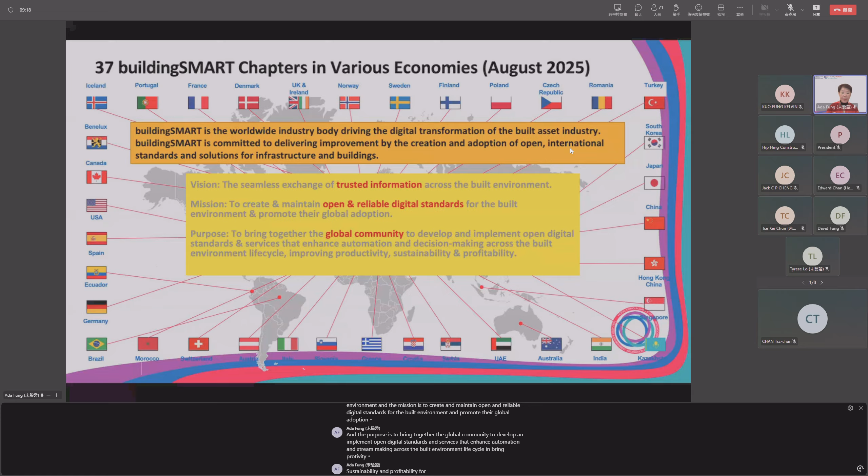So we adopt OpenBIM as we want to be successful in BIM implementation for collaboration with reliable data exchanges, and sustainability is safeguarded by long-term interoperable data standards. At its core, OpenBIM is a collaborative process that is vendor neutral. This is very important, especially when there are so many geopolitical situations that may change.

While BIM is a digital representation of built assets, GIS is a framework for gathering, managing, and analyzing data. So the use of BIM for assets and GIS for spatial data supports applications across virtually all sectors of human activities. This is important for a smart city.

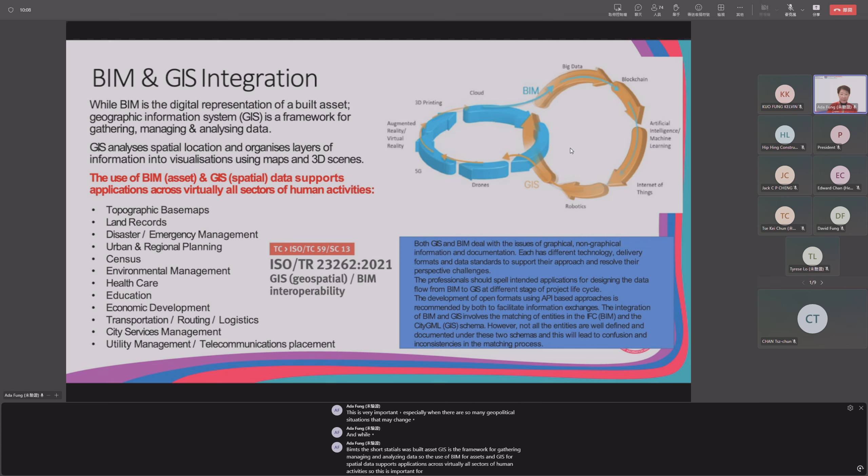First is virtual classroom, like tonight's event. Second is the BSI Professional Certification Foundation Program. Third, BIM and GIS training program. Fourth, special events in hybrid mode. Fifth, the Hong Kong OpenBIM OpenGIS Awards. And the sixth is Building Smart International Summits and Building Smart International Awards.

We grow these day by day and year by year. So we are now in our virtual classroom. Classes have been held since April 2020, and we're now in season 11, not 10. It's OpenBIM from learning to practice. Season 10 was OpenBIM, IFC, and beyond. So now we're focusing more on practice.

So the second type of training is professional certification, where Building Smart International certification is the global standard for OpenBIM training. That's why we adopted it. And we now have 2 certified training providers in Hong Kong, namely SBI and also BLE Shenzhen.

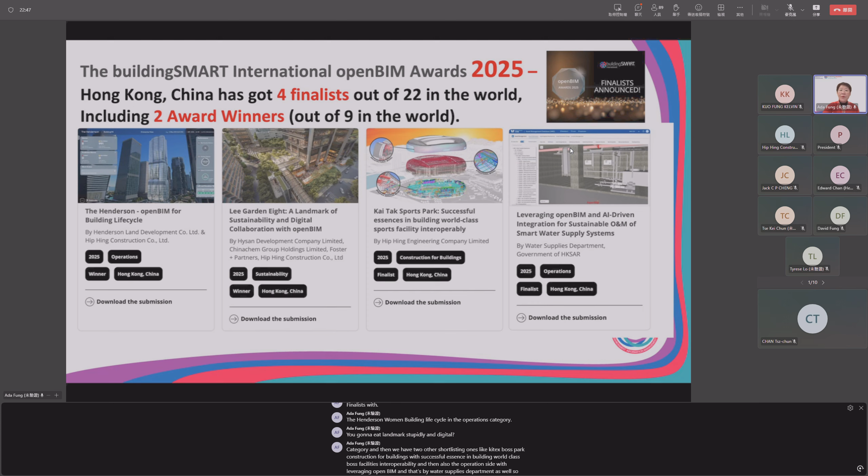Next, I would like to invite you to join us to go to buildingSMART International Summits program. Enjoy special discount for Hong Kong if you get 10 or more delegates. The next one will be held March 24 to March 26 in Porto, Portugal.

And there are 10 sector-facing domains comprising airports, building, construction, infrastructure, electrical, product, railway, regulatory, technical, and maritime, followed by a few more to come, which is healthcare, water management, energy, and power.

So here, with the core OpenBIM workflow from the use case management to define your business needs, and then define project information requirements with BSDD and also IDS, and then create a data set by using IFC, and then validate, and then review, communicate, and collaborate with BCF, and then that is to share using OpenCDE.

And for certification for the training part, we have the foundation program already in practice, and next we're going to launch the practitioner level. So stay tuned.

And in a Building Smart context, what do we expect? Now, we aim to achieve more sustainable, less expensive buildings infrastructure through optimized decision-making and automation efficiencies, enabled by data interoperability and accessibility via open digital standards and services.

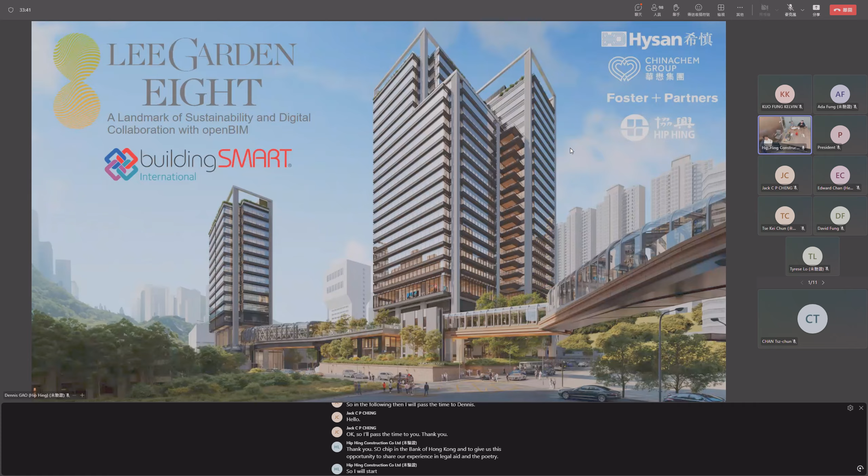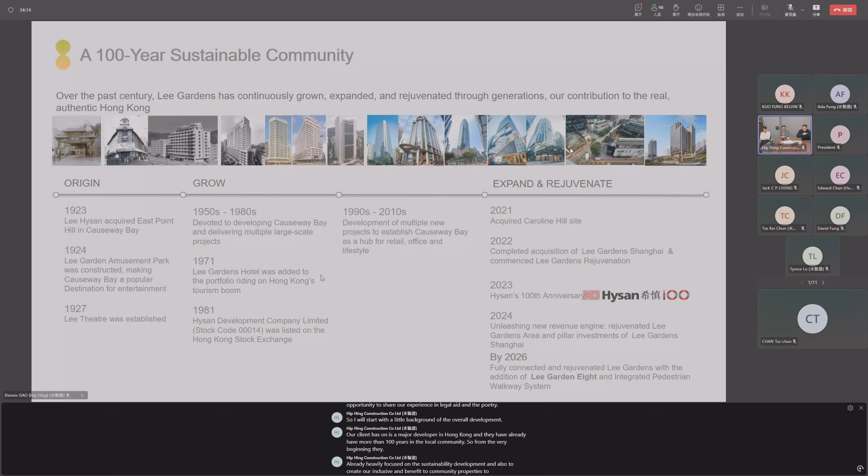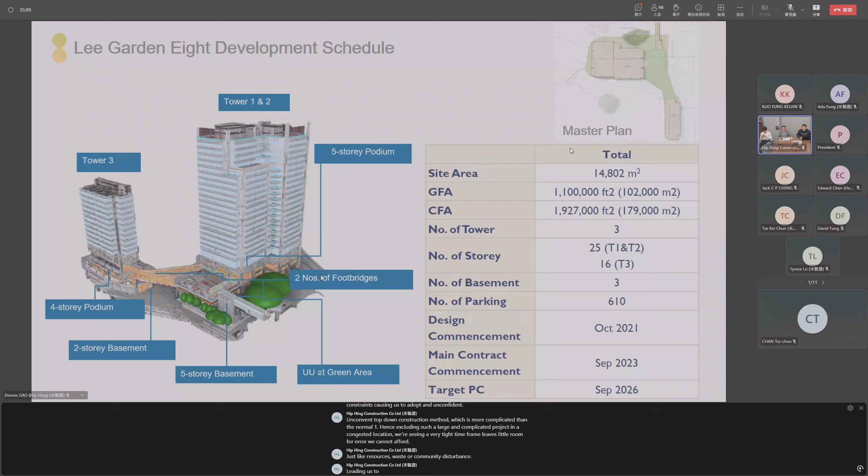To understand the scale of the project, let's look at it. Lee Garden Eight is a massive and complicated project, comprising 3 office towers and 5 basement floors with over 1 million square feet of GFA. It has many site constraints causing us to adopt an unconventional top-down construction method, more complicated than normal. Executing such a large project in a congested location within a tight time frame leaves little room for error. We cannot afford inefficient logistics, resource waste, or community disturbances, which made clear traditional construction methods are inadequate for these challenges.

We assembled a world-class team to realize our vision, including Foster + Partners, Ronald Lu & Partners, Arup, WSP, Arcadis, etc., with Hip Hing as the main contractor and ATAL as the MEP subcontractor. In our industry, consultants and contractors often work with different software and workflows, creating silos where information can be lost or misinterpreted. We dismantled these silos by insisting on open standards, establishing a unified language for seamless collaboration. This ensures transparency and efficiency across all parties and allows us to retain ownership of a comprehensive, well-coordinated BIM model.

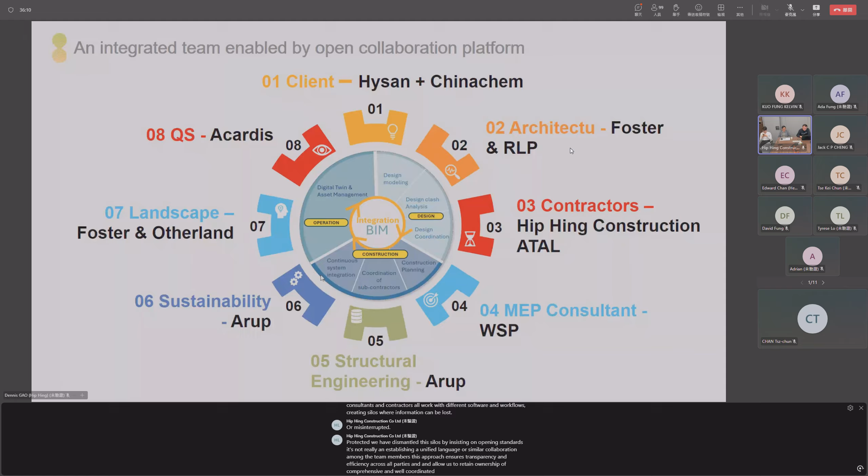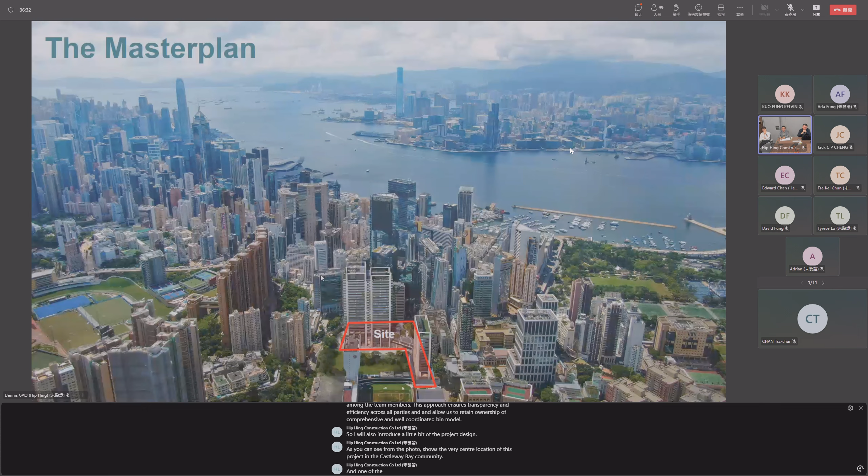I'll also introduce a little about the project design. As you can see from the photo, this shows the very central location of the project in the Causeway Bay community. One major site condition is the banyan tree shown here, which is more than 100 years old - an old and valuable tree. We have an obligation to preserve and protect this tree throughout the entire development process.

From the very beginning, our architect considered this tree in the overall design of the property. The concept is not to create an isolated island of property in the community, but to create an open, inclusive environment to benefit the overall population in this area.

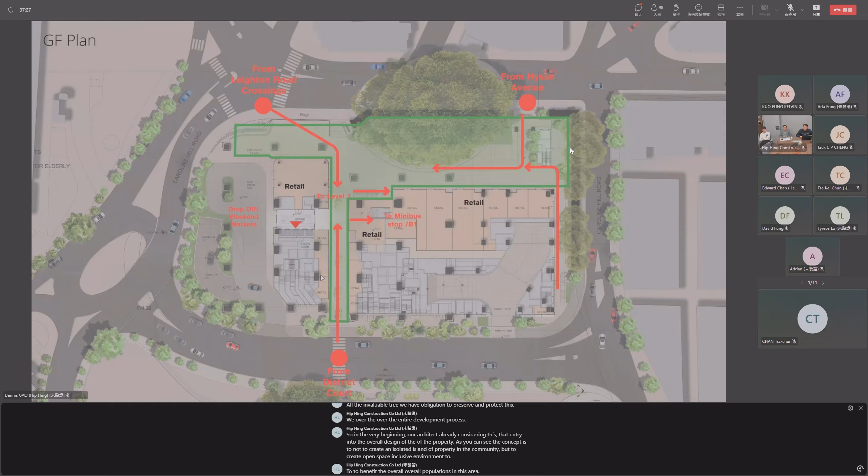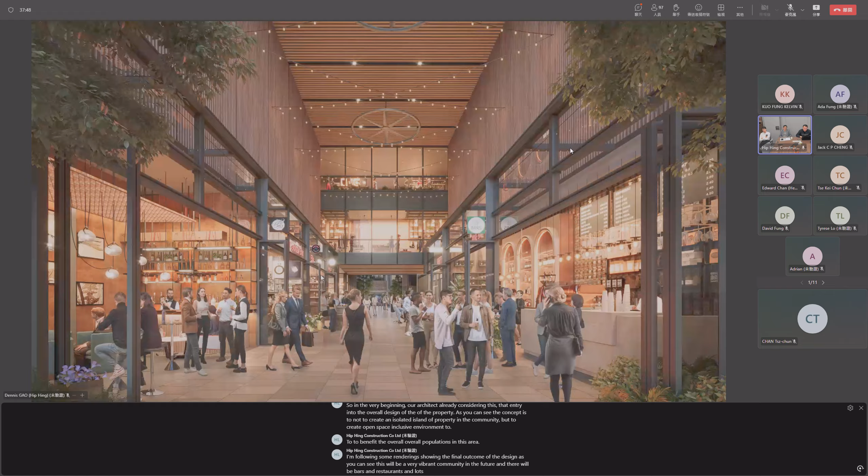Following renderings show the final outcome of the design. This will be a very vibrant community in the future, with bars and restaurants and lots of open space for people to gather and chat. Maybe in the future you and I can spend some time in this project, and we welcome you to visit after completion.

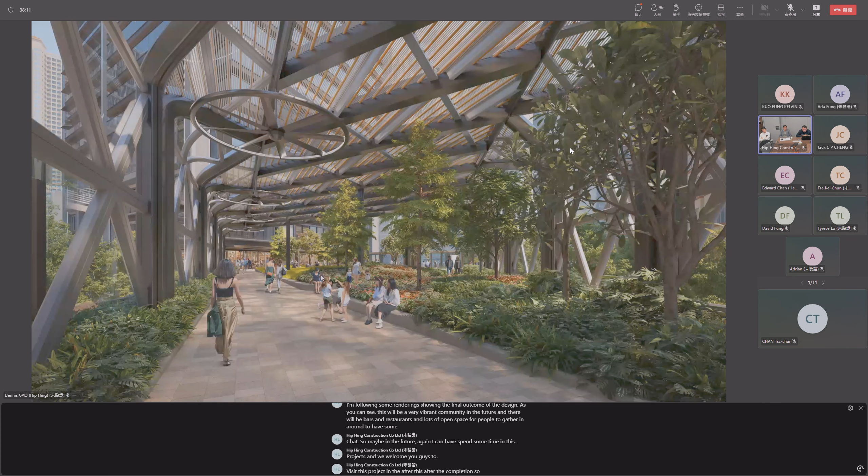Back to the BIM core part, I'll start with our roadmap. Our BIM implementation follows the CIC Hong Kong standards and complies with ISO 19650 governance. We established the open BIM approach as the foundation for information management across the entire project lifecycle. In the following slides I'll walk you through specific use cases demonstrating how we applied open BIM to solve our most critical project challenges.

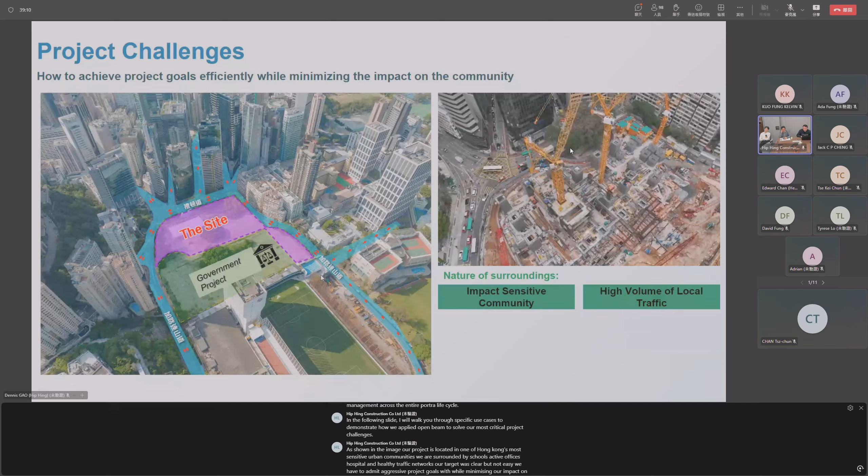As shown in the image, our project is located in one of Hong Kong's most sensitive urban communities, surrounded by schools, active offices, a hospital, and heavy traffic networks. Our target was clear but not easy: we had to meet aggressive project goals while minimizing our impact on this vibrant community. We could not afford to be a bad neighbor.

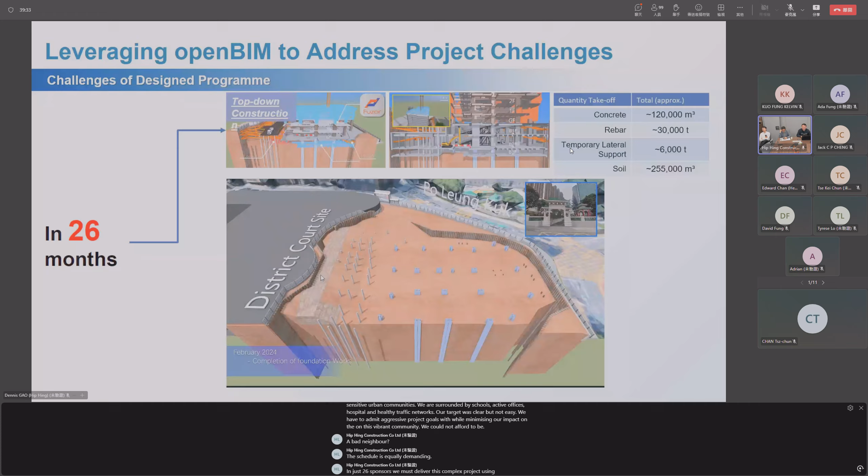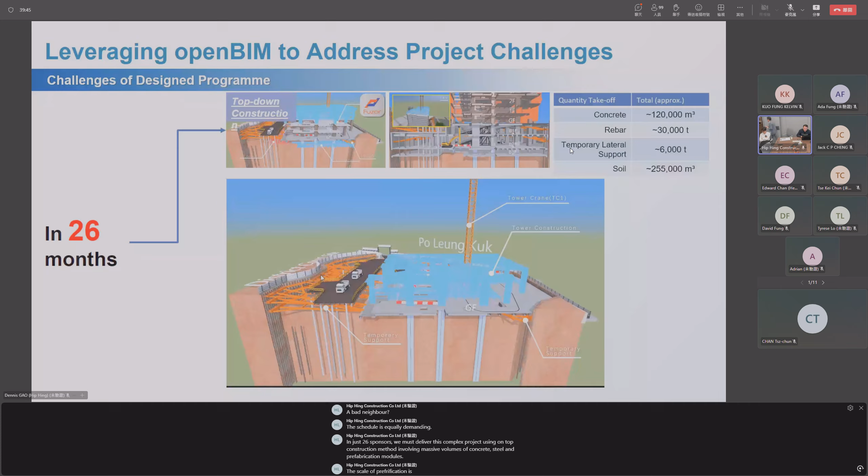The schedule is equally demanding. In just 26 months we must deliver this complex project using a top-down construction method, involving massive volumes of concrete, steel, and prefabrication modules. The scale of prefabrication is very large - over 80% of the building services were designed to use the MiMEP method, resulting in more than 7,400 modules that needed to be manufactured, transported, and installed. To manage this complexity, the open BIM approach was essential to keep the client, designers, and contractors synchronized around a single source of truth. Let me elaborate using our MiMEP journey as a case study.

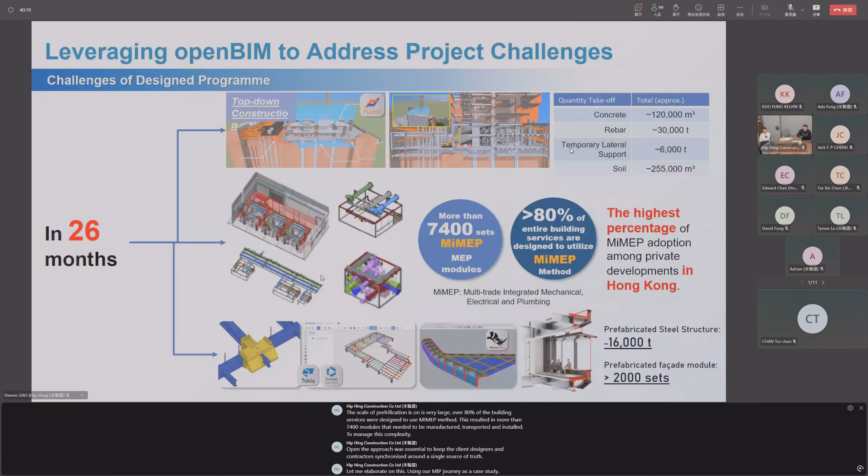As mentioned, more than 80% of the building services are designed using the MiMEP method - the highest percentage of MiMEP application for a private development in Hong Kong. The extent of these modules is comprehensive, distributed across every single level of the building. We categorized them into 6 major types, each including a significant volume of modules. ATAL is the E&M, NSC, and MiMEP specialist contractor for this project. Managing this volume of implementation requires precise collaboration among contractors, designers, and project managers.

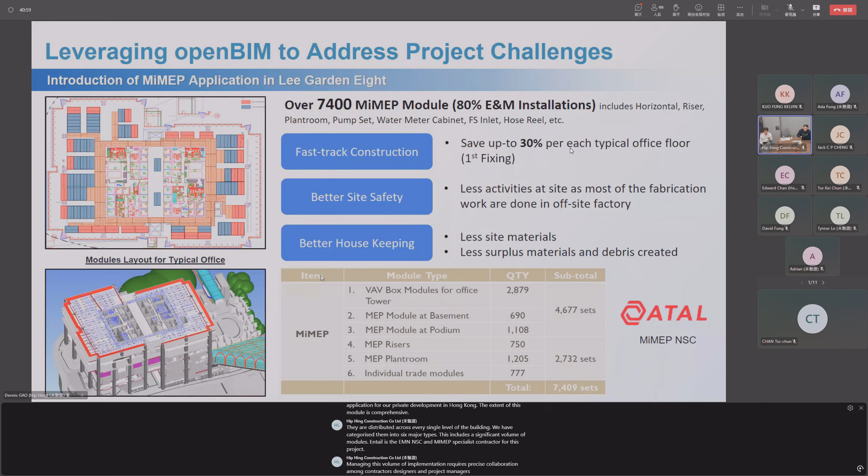Our MIMEP journey began with intensive design coordination. We used the OpenBIM platform to bring the consultants and contractors onto the same page. The key here was standardization.

By defining a library of typical repeatable modules, we made the manufacturing process efficient and the installation sequence flexible. We also ensured the layout was optimized for future maintenance access.

Technically, we utilized clash detection tools and software for rule-based code checking to identify design issues while using BIM Track to manage the resolution process.

As the main contractor, we lead this workflow. We collected individual trade models from the NSCs and combined them with the builder's model for tracking. Together with our engineers, we conducted the initial screening to find the most efficient way to resolve these issues.

On the screen, you can see two comparisons showing the result of this coordination, transforming a complex web of services into a rational, clash-free arrangement.

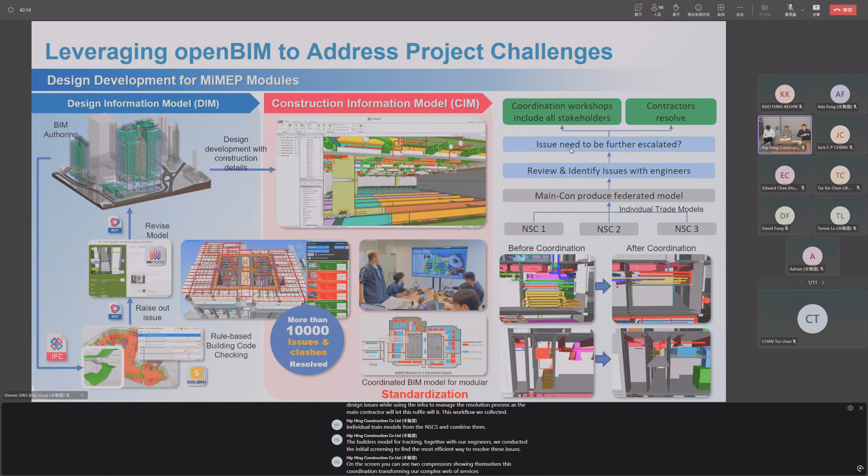The result of this digital collaboration is a seamless transition from the design model to the fabrication model. What you can see here is the direct one-to-one relationship between the BIM model and the physical module being assembled in the factory. This process eliminates ambiguity and ensures precision.

The MIMEP NSC agent also applied an RFID tracking system to help the project team monitor the fabrication, delivery, and installation status. This end-to-end traceability is a powerful example of how BIM, DFMA, and IoT-enabled logistics can work together.

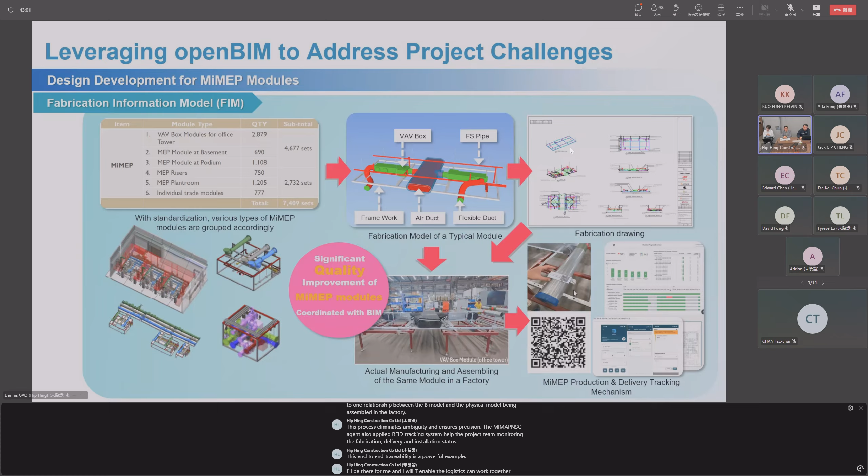With thousands of modules to handle, logistics became one of our biggest challenges. We used ArcGIS data to analyze delivery routes and plan our logistics early on. However, getting the modules to the site was only half of the battle.

Due to the size and weight, vertical delivery required tower cranes, which were already busy with steel erection. To manage this, we conducted detailed lifting simulations and scheduled dedicated crane slots to ensure just-in-time delivery.

Once the modules landed on the designated floor, automation took over. We utilized carrying robots to transport the modules to their installation spots, then used remote-controlled lifting platforms to elevate them to target heights for final installation. This combination of simulation and robotics ensures a smooth, safe, and efficient installation process.

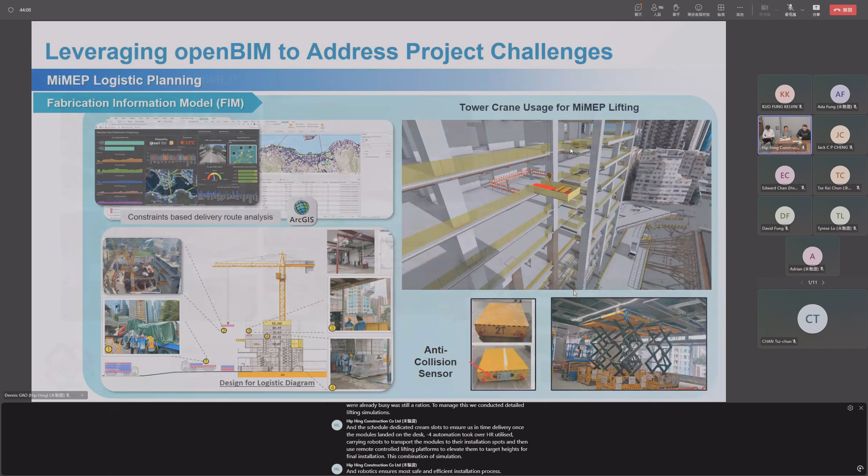Please take a look at these photos. As you can see, the construction site is quite clean and organized. This is the direct result of MIMEP. It not only improved the quality of the MEP installation, but also significantly reduced construction waste by 70% and lowered the installation manpower by 30%.

If you look at the comparison between the as-built laser scan and our coordinated BIM model, you will find the final installation matches exactly what we planned in the early stage.

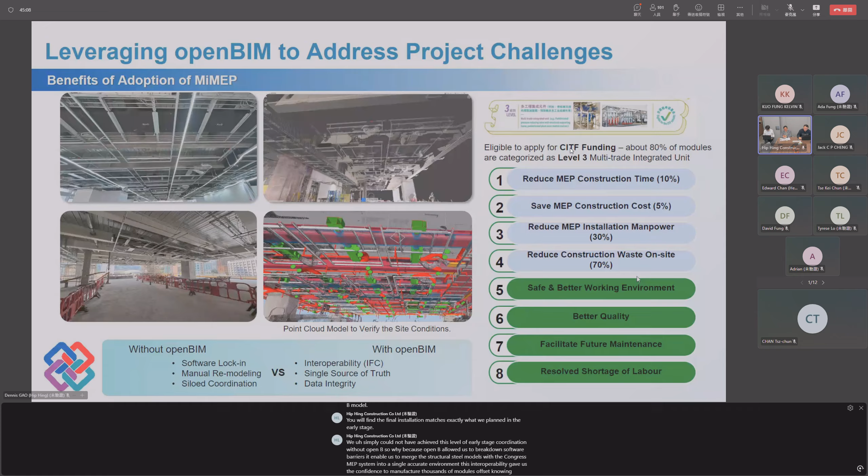We simply could not have achieved this level of early stage coordination without OpenBIM. Why? Because OpenBIM allowed us to break down software barriers. It enabled us to merge the structural steel models with the complex MEP system into a single accurate environment. This interoperability gave us the confidence to manufacture thousands of modules off-site, knowing they will fit on-site conditions when they arrive.

So how can we carry this design and fabrication certainty into operations? To echo Professor Ada's sharing previously, I will use the asset information model workflow as a case to illustrate how OpenBIM workflow can be applied in a project.

We shall start with the client's asset information requirement, especially the need to coordinate with facility managers to define the required parameters in the BIM model. Client-specific bSDD can be created as the dictionary for the parameters, which can be reused across the rest of the portfolio. In parallel, we prepare an IDS file for data compliance checking.

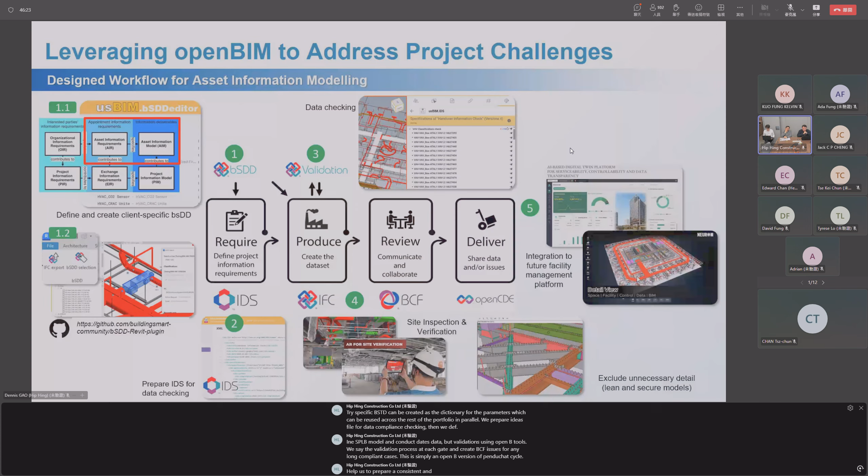Then we develop various verified as-built BIM models and conduct data validations using OpenBIM tools. We set up a validation process at each gate and create BCF issues for any non-compliant cases. This is simply an OpenBIM version of the Plan-Do-Check-Act cycle. It helps us prepare a consistent and vendor-neutral base for digital twin integration.

Our challenge also extends beyond our boundary. We share interfaces and structural dependencies with an adjacent government project. The harmony of the structural design determines community-wide stability. There are critical needs for design coordination of the excavation program, temporary structure, and underground utilities.

Since the nature of the neighboring project is a law enforcement facility which possesses high security concerns regarding internal design information, plus the concern of software versioning issues, we came to an agreement to use an interfaces-only approach that exchanges IFC4 reference view models for coordination and analysis.

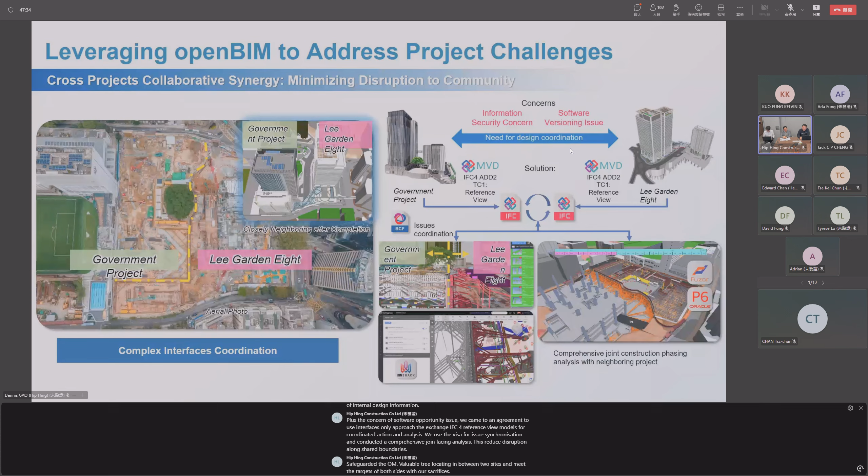We used BCF for issue synchronization and conducted a comprehensive joint phasing analysis. This reduced disruption along shared boundaries, safeguarded the old and valuable tree located between the two sites, and met the targets of both sides without sacrifices, which is an uncommon cross-project use of OpenBIM in a building project.

We also utilized ArcGIS data to make data-driven decisions about logistic optimization. This resulted in creating traffic diversions within our project to ease the burden on the community and avoid conflicts with the neighboring project. Furthermore, we had to manage the interface with existing buildings, including a new footbridge connection.

We combined existing condition models with our design models to conduct early sequence planning. This allowed us to optimize the sequence for overnight lifting installation, minimizing the impact on local traffic.

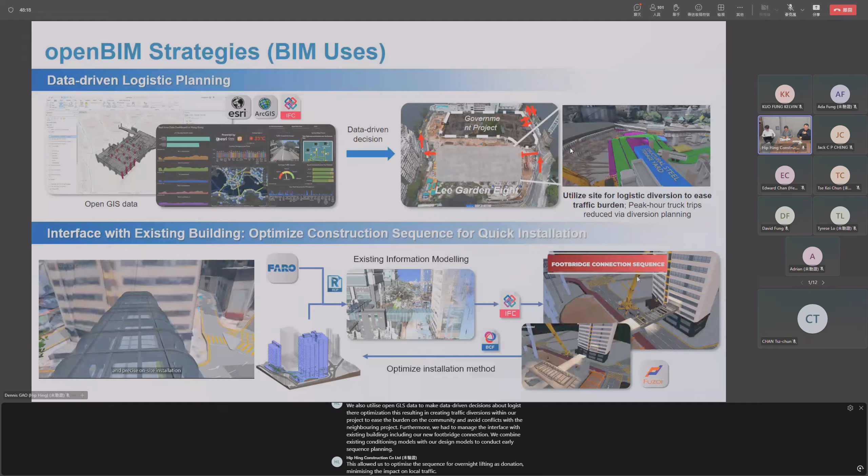Of course, safety is our highest priority. To ensure it, we use 4D simulation to virtually rehearse complex construction activities before actual implementation. This allowed us to visualize the exact sequence, map out access routes, and pinpoint potential safety risks. By doing this, we could improve our method statements, spot clashes with temporary works, and most importantly, communicate clear visual safety measures to our frontline workers.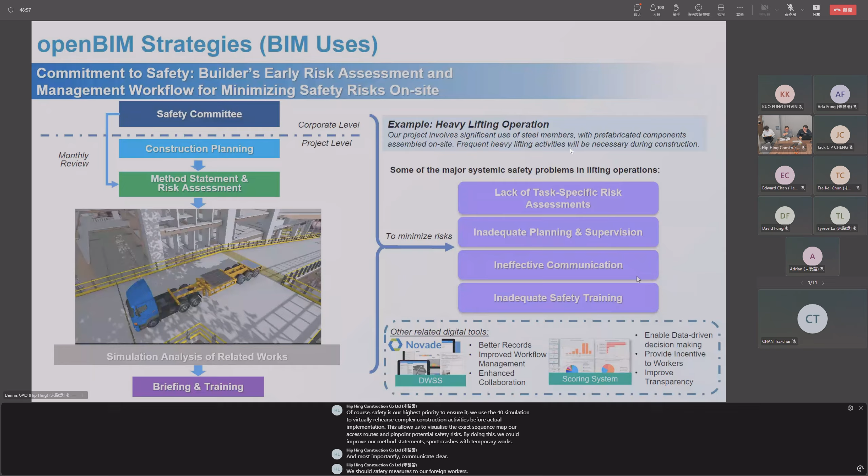To increase coordination efficiency for site construction, we went beyond rule-based checking and utilized visual programming to automate repetitive tasks. For example, we automated labor-intensive processes in drawing production, such as view generation and tagging. This accelerated our mass drawing production by 300%.

We also adopted the BIM cave for this project. By integrating actual site conditions with our design model, we created a virtual mock-up. This immersive experience made design reviews much more intuitive, driving faster and more confident decision-making.

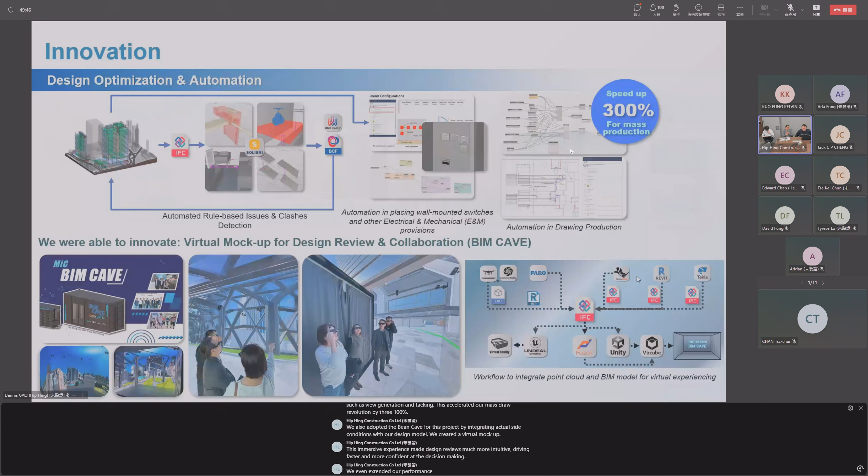We even extended open formats into innovative product design and development. For example, we deployed a remote control tower crane system, the first of its kind to practically operate on a construction site in Hong Kong. In fact, it has been continuously working on site for more than a year now.

We not only used open formats in the product design itself, but we also used the BIM model to create a training simulation program. Currently, we are also exploring model-based tower cranes and autopilots.

Furthermore, open BIM formats allowed us to integrate the project model into our proprietary product, the centralized management platform, by combining the model with data from IoT sensors, smart safety equipment, and our digital works supervision system, to enable transparent real-time project management.

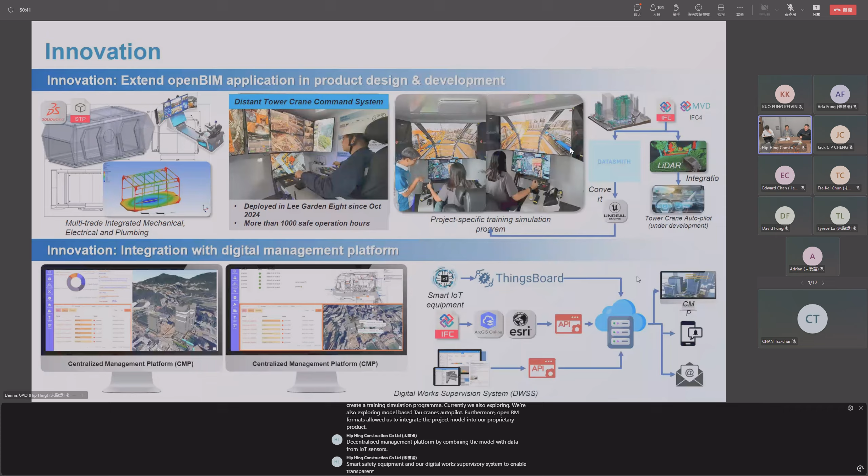Beyond the digital model, our commitment to innovation extends to our frontline management. We implemented Hip-Hing Connect, our proprietary mobile app system. It acts as a safety performance management tool, where worker behavior is recorded. We use this to drive a positive safety culture. Good behavior is rewarded, while unsafe behavior is penalized accordingly.

Finally, we are actively adopting construction robotics on site, as shown in the photos and videos. These robots are actually deployed in our project. We believe these robotic technologies can help us increase productivity and, most importantly, keep our people safe.

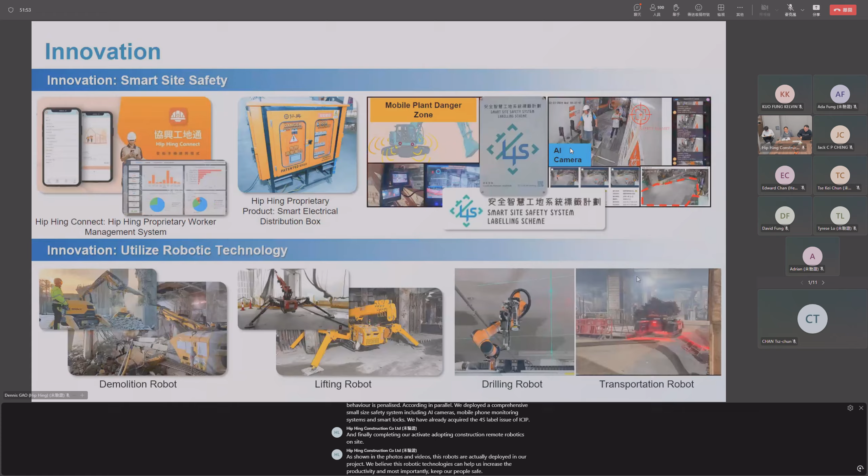To quickly wrap up the technical execution, with the help of Unity tools, we were able to resolve thousands of clashes rapidly, keeping the project on track and reducing abortive works.

Without the OpenBIM approach, we simply could not have secured this ambitious program or ensured the precise manufacturing of such a massive volume of combination elements, especially in MiC (Modular integrated Construction).

Furthermore, OpenBIM formats helped us secure data integrity across thousands of file exchanges, ensuring data longevity for the future operation stage of the project. So that's all of my sharing.

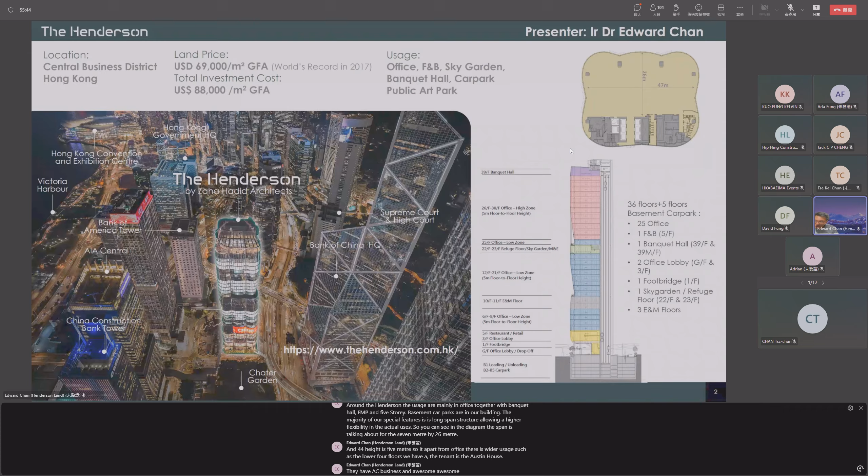We have a tenant that is an auction house. They have exhibitions and auction activities in the same floor space.

The Henderson was completed in the first quarter of last year. Tenants have already moved in, and the Henderson is now the new icon of Hong Kong. You can see some of those videos, such as our partnership with the World Green Building Council, and also features with BBC StoryWorks and National Geographic on specific topics.

Our anchor tenant, Christie's, also speaks to how our ESG partnership program aligns with their long-term operations. The Henderson has already been accredited by 10 different accreditations covering green building, health and well-being, smart building, and sustainable transport and lifestyle aspects. The purpose is to set out a future-proof framework to facilitate long-term sustainable operations.

Another important milestone for the Henderson, as just mentioned by Ada: we achieved the winner award in 2022 for the Building Smart International Award in the construction category, and last year we also received the winner award in the operation category. These achievements set out the foundations for Open BIM applications throughout the project, from the design stage to the operation stage.

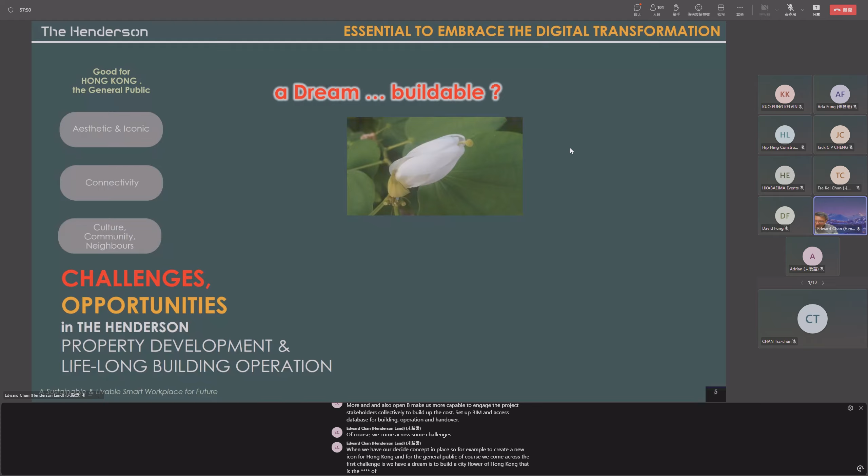Of course, we came across challenges when putting our design concept in place. For example, to create a new icon for Hong Kong, our first challenge was our dream to build the city flower of Hong Kong - the bud of a Bauhinia. The problem was that it was not buildable given the technology available at that moment.

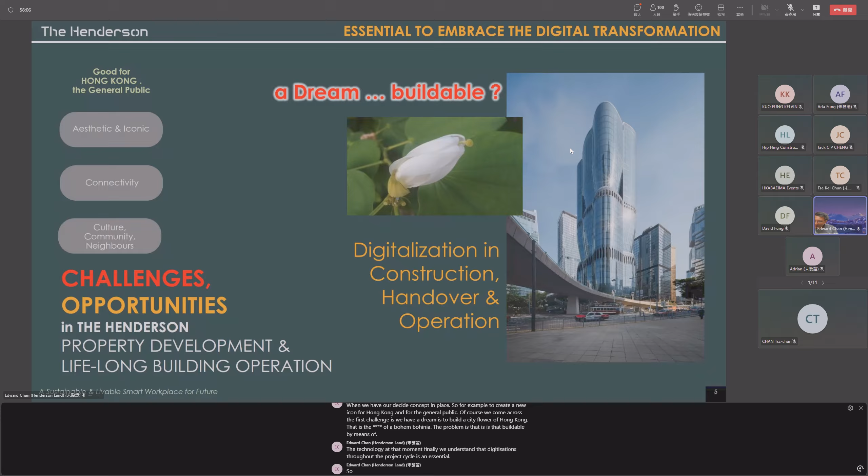Finally, we understood that digitization throughout the project cycle was essential, so digitization and Open BIM came into place. Another challenge was that from our experience with many other projects, whether residential or commercial, we keep improving over time.

So for this project we set out 5 operational objectives: smart, green, resilient, hospitality, and health. The ultimate goal is to cooperate with people-centric, science-based office design, and also embrace innovations for a sustainable future.

We also extend our partnership beyond internal stakeholders to our building operator, our tenants, and individual tenant staff. In our ESG awarding program, we have been collecting Open BIM spatial models in the digital app.

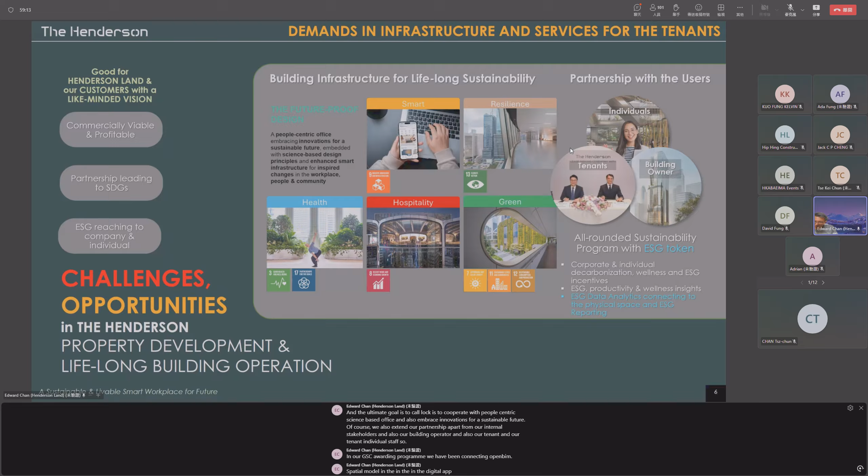Whether it's our frontline or operation staff, or senior management staff, they can access the digital twin through the web-based platform. Currently, we are talking about 100 million dynamic data points flowing into the digital twin in a year.

The Open BIM applications begin from the CDE, shown on the left-hand side of this diagram, then flow into asset and stock management, maintenance management, space management, and are further connected with our integrated tenant experience analytic platform, ITEAP, and the smart tenant apps - the main focus for our tenants.

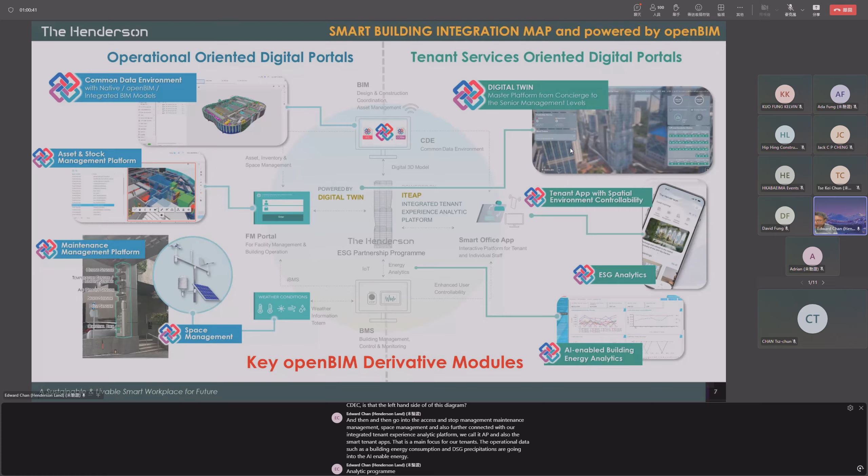Operational data such as building energy consumption and ESG precipitations feed into the AI-enabled energy analytic program and also ESG analytic platforms for our tenants.

The BIM is also integrated with the facility management portal I mentioned earlier at the handover stage. The asset information and corresponding BIM model can be used on the web platform and mobile platform, and also for on-site maintenance and preventive maintenance applications.

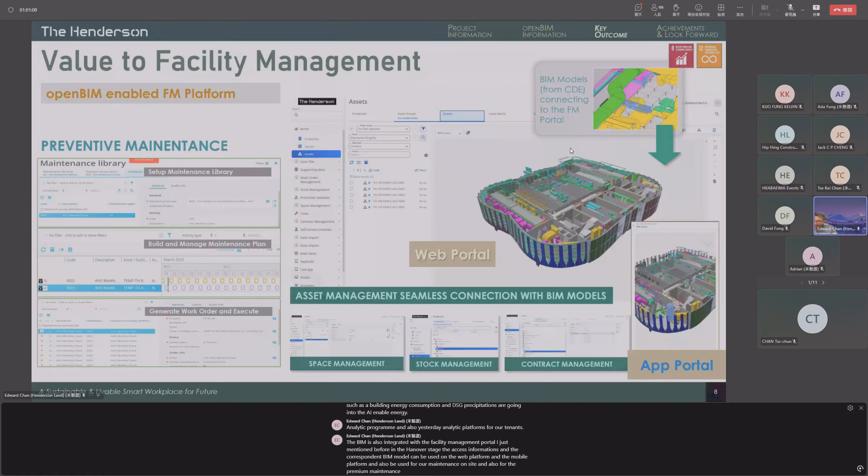The purpose of the digital twin is to realize data-driven building operational management, spatially enabled by Open BIM. The digital twin is now connected with 45 smart systems via different communication protocols - some relating to API, and some relating to graphic or imaging communication.

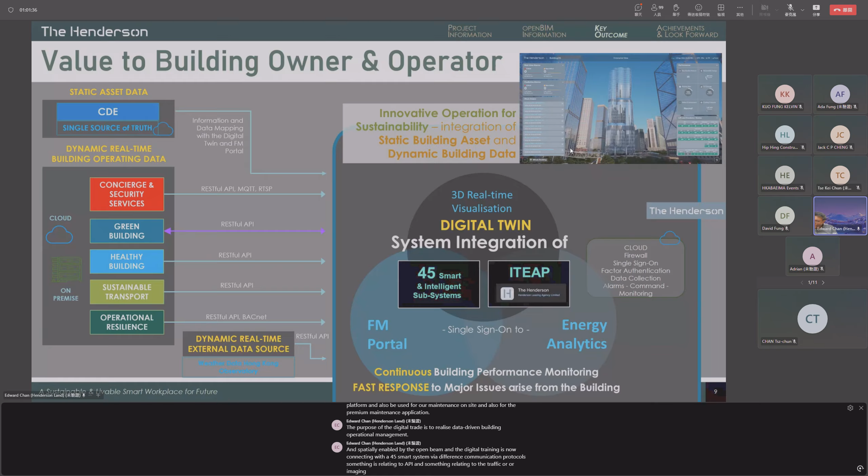Each device is mapped with the static asset data in the BIM model, and dynamic data points actually come from the building system - some collected from the IoT system, some connected with the traditional BMS system. All those dynamic points and static asset data feed into the digital twin.

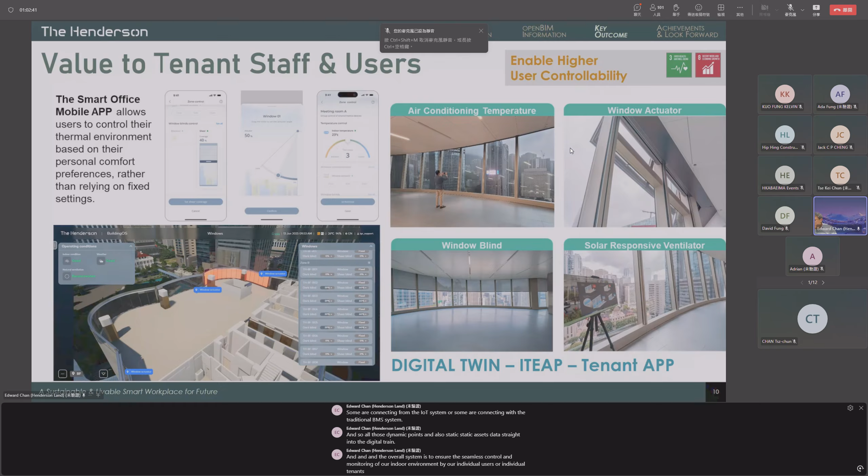The overall system is to ensure seamless control and monitoring of our indoor environment by our individual users or tenants. We also provide data, ESG analytics, and data to our tenants.

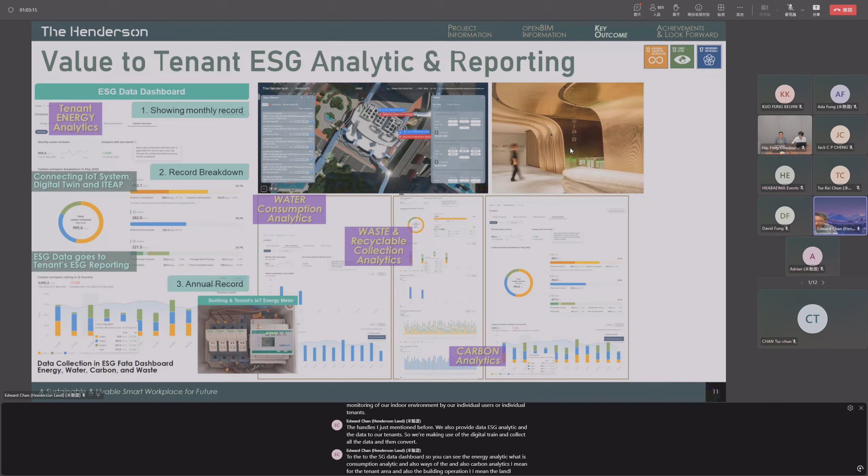We make use of the digital twin, collect all the data, and convert it to the ESG data dashboard. You can see energy analytics, water consumption analytics, waste audit, and carbon analytics, for the tenant area and also building operation, meaning the landlord area. All the data gets packed together and transferred to our tenants.

What is that? That is part of our ESG partnership program, which I've mentioned before a few times. It consists of four major areas. One is carbon neutrality, which covers energy, water, waste, and carbon.

Another important aspect is health and well-being, connecting with our IAQ sensors and outdoor weather stations. Because we expect more and more tenants from international companies, one of our key areas is integrated culture. The final area is that we expect the program to run together with our tenants and individual staff, with indicators relating to the partnership for good.

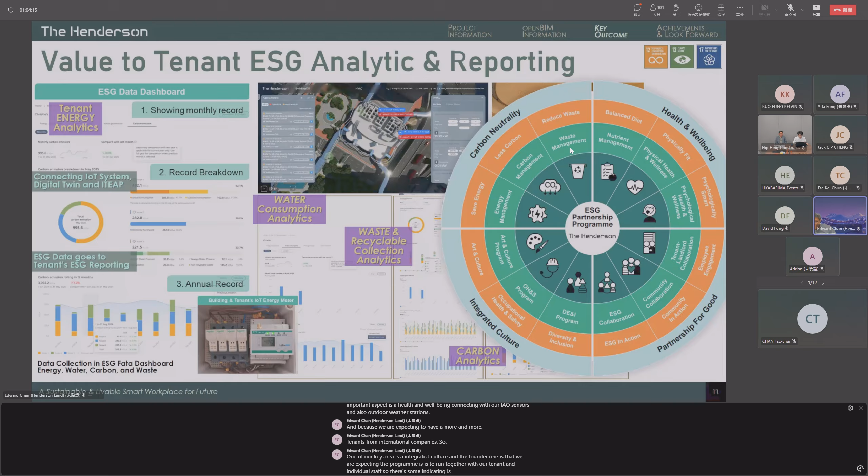The coming slide will be presented by Tommy. He's going to talk about the technical details of the OpenBIM applications. Maybe Tommy, I'll let you share the screen.

Let me see how to... Tommy, it's your turn. Hello, can you hear me? Yes, I'm sharing the screen right now. Okay, can you see the screen here? We can see it, but you can change to presentation mode, I think. One moment, please. Yeah, it's good, it's good.

Okay, thank you Edward. So here, let me share more about the construction stage. We'd like to take this opportunity to thank Edward and also our leading architects and so on, for leading us through the long marathon of the whole project lifecycle.

Starting from the design stage, we took the blessing of OpenBIM and OpenGIS, like the information delivery manual and the model view definition, specifying from the project specification that we need to comprehensively use IFC and the BIM collaboration format, BCF. With such comprehensive requirements and our expertise in cultivating the information pool, we tried to build the asset bit by bit up to the operation stage.

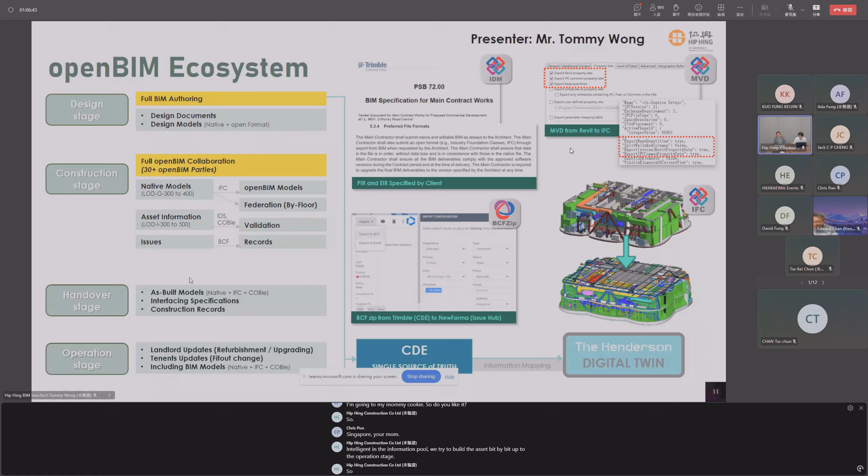Let us share more about our routine use of OpenBIM. Firstly, in our daily collaboration, we make use of different types of software depending on their expertise. We use OpenBIM techniques like IFC and BCF to store all the collaboration legacies and issues, such as using BIM Track for tracing all the issues to enhance traceability.

In our process specification, it specifies that we should have a BIM meeting once per week. And when we are actually using BIM and OpenBIM for collaboration, we use them for collaboration day by day in every meeting.

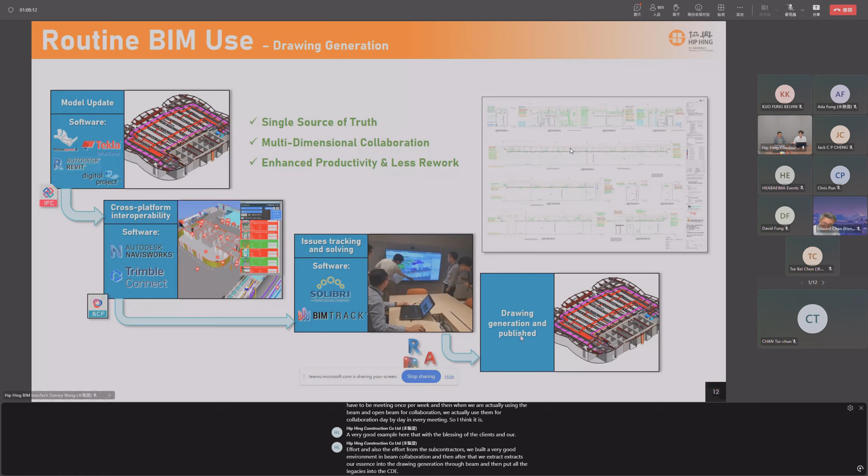I think it's a very good example here that with the blessing of the clients and our efforts, and also the effort from the subcontractors, we built a very good environment for BIM collaboration. After that, we extract our assets into drawing generation through BIM, and put all the legacies into the CDE. Now I'll share two major use cases in the construction stage, and then wrap up the whole case in one scenario in the following slides.

The first case is the substructure. Our building, the Henderson, is actually in proximity to 2 major MTR tunnels nearby, which makes the whole substructure construction very tight and very complicated. We actually need to build a 5-story substructure, where even a little careless planning could cause very severe consequences.

In our construction stage, the original plan had an ELS system nearby. After our consideration of the loading, we actually used the preload strategy to replace the original system.

We use surveying to monitor the MTR tunnel for proximity to our construction, then run the simulation in BIM, and do all the optioneering through OpenBIM, using the preload structure through Tekla, and Revit for the building construction. After a lot of analysis and simulation, we arrive at the final settlement design to minimize

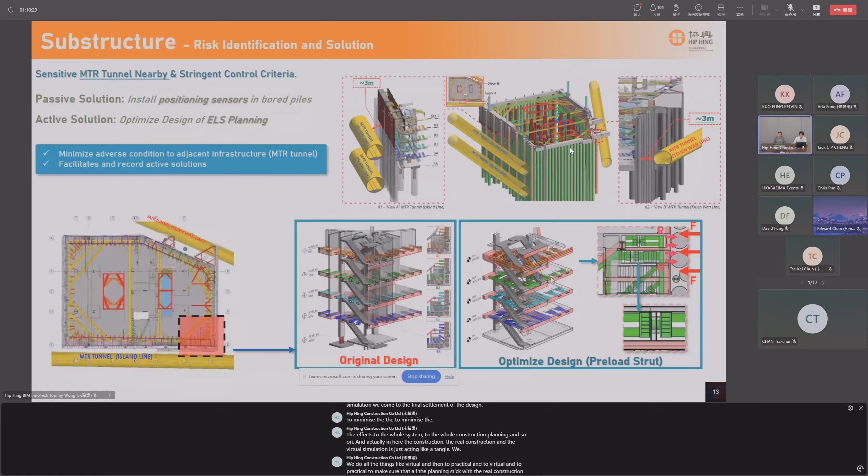Let us share another use case: the superstructure. Here we have a lot of different subcontractors - there are two main ones. For the facade side, the subcontractors are from overseas and from the mainland, and the subcontractor for the steel structure is another one from the mainland.

Under the specification, the facade installation is done by the facade subcontractor, and the embed installation is also done by the facade subcontractor. But we found that the facade embed could actually be installed earlier, while the steel structure is still in fabrication. So we brought the two parties together so the facade subcontractor could give all the embed details to the steel structure subcontractor in OpenBIM format, allowing them to do the fabrication in the steel yard before transport to site. This saved over 50% of the time for facade panel installation.

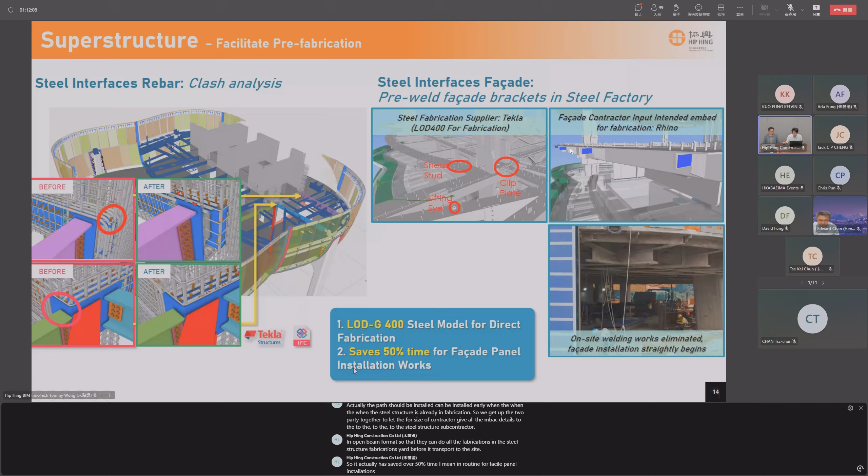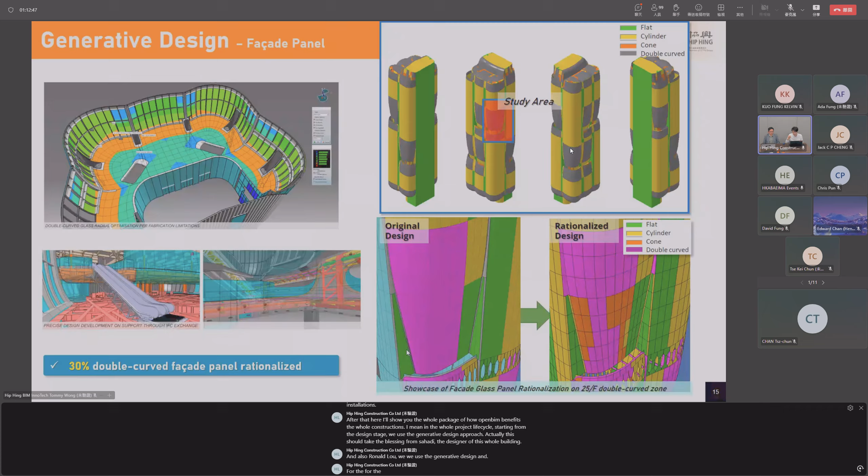Now I'll show you the whole package of how OpenBIM benefits the whole construction, across the whole project life cycle, starting from the design stage. We use a generative design approach - taking inspiration from Zaha Hadid, the designer of this building, and also Ronald Lu. We use generative design for the best design options, then optioneering to optimize the design into a rationalized, cost-efficient way, reducing

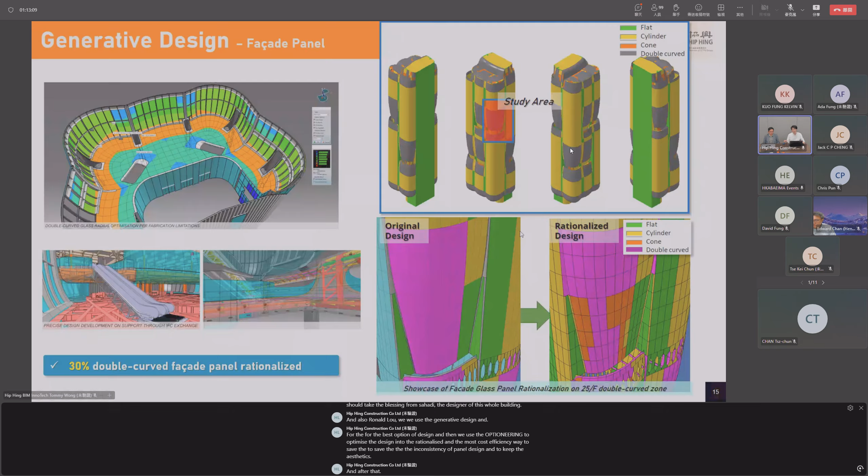inconsistency of panel design while keeping the aesthetics. After that, we have gone through a lot of construction design and construction collaboration.

Then when we move to the post-construction stage, we use field verification to capture the installation and post-loading of the steel, to make sure the ceiling height can be maintained even with slight construction deviation. We do this field verification on every floor.

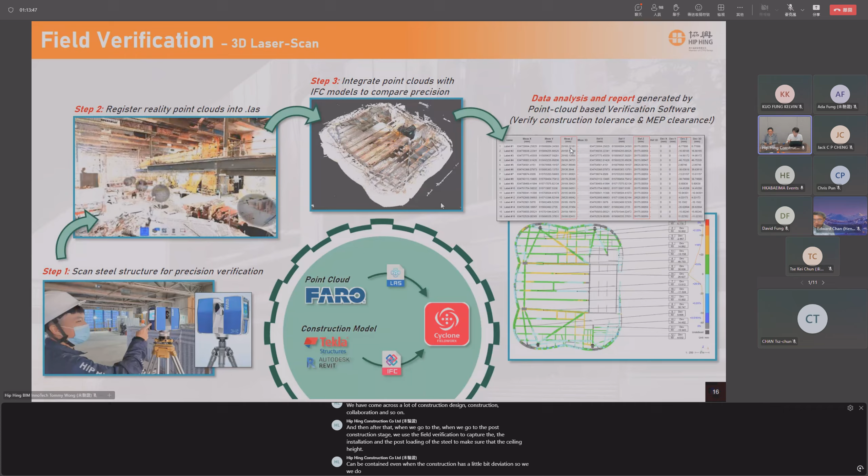When it comes to the handover and operation approach, we make use of ISO 19650-3 and 19650-4, which cover operation and COBie. As the main contractor, we first laid out the whole handover process, from creating a new BIM model and design, to how the data can be converted into

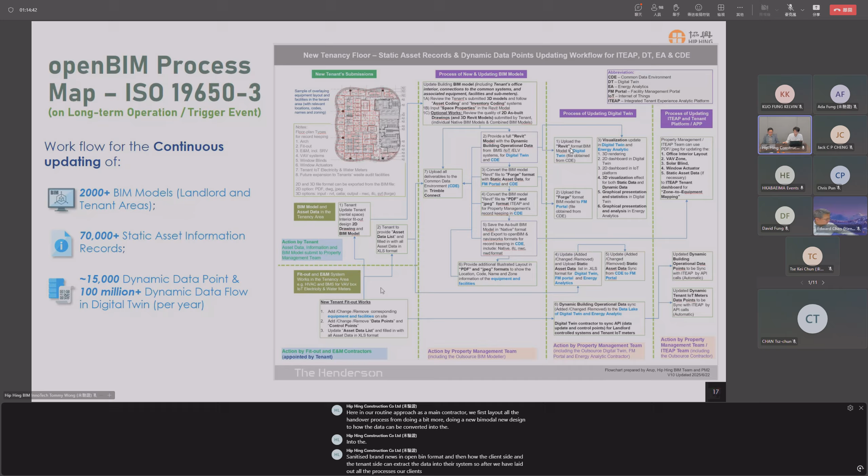the standardized format in OpenBIM, and how the client side and tenant side can extract the data into their own systems. After laying out all these processes, our clients defined the roles and responsibilities for each party at the post-operation stage, such as for A&A works.

With this practice, we successfully standardized and digitalized over 70,000 pieces of static asset information, and among them, over 15,000 are dynamic - meaning the data can be live, such as airflow, temperature, and so on.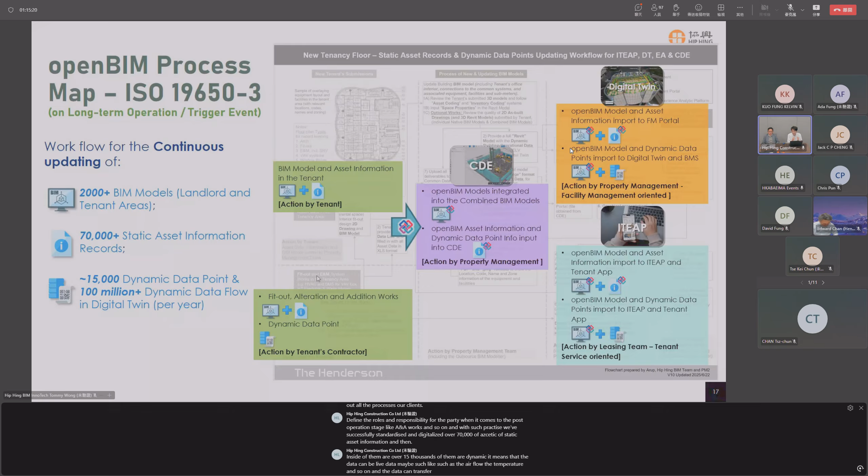The data can transfer between different systems through the asset data code - this is the asset data code we agreed on from the construction stage through to the handover stage.

Our standardized coding system covers the coding method for assets across the following systems: the equipment itself, the BIM model, the digital twin, the FM portal used by the client's facility management side, the tenant experience analytic platform which is highly valuable for tenants during operation, and the building management system, BMS.

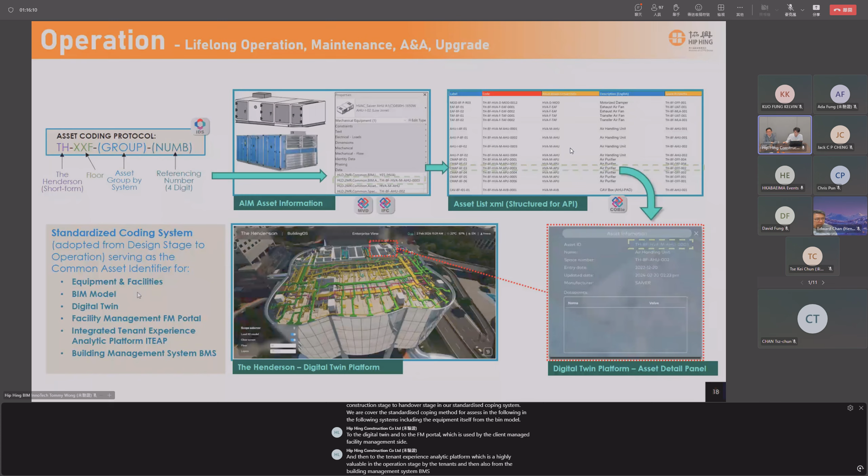And this is the result. Our facade construction was carried out in OpenBIM format from the design stage, to rationalize the whole facade.

When it comes to procurement and future procurement in the operation stage, all the legacy asset data has already been well kept in the CDE and the digital twin, to ensure future assembly efficiency, with all the information already stored in each facade panel.

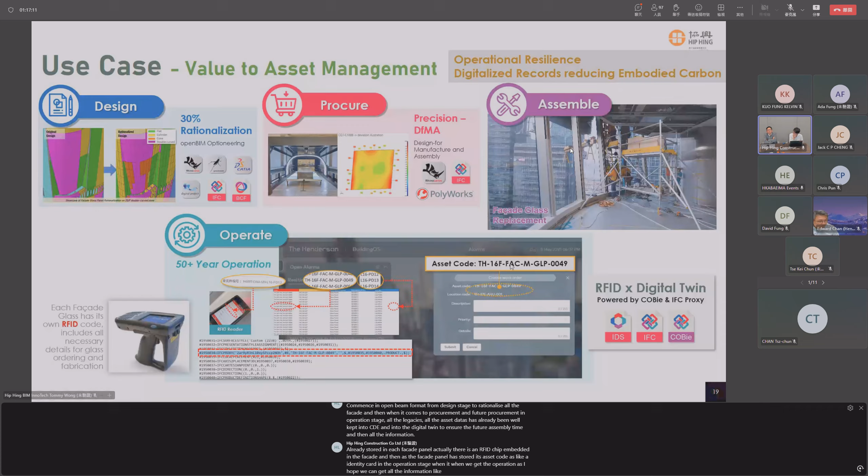There is an RFID chip embedded in the facade, and the facade panel stores its asset code like an identity card for the operation stage. When we scan the operation asset code, we can get all the information like the maintenance period, the assembly period, and so on.

In our interior design, construction and collaboration delivery, we already make use of AR tools together with BIM to allow pre-planning when the construction of steel structure and concrete structure is completed. We gather all the subcontractors, like the E&M subcontractors and the facade and interior fit-out subcontractors, together to determine their order of installation. We also make use of this AR tool and OpenBIM to show our handover to our client and tenant.

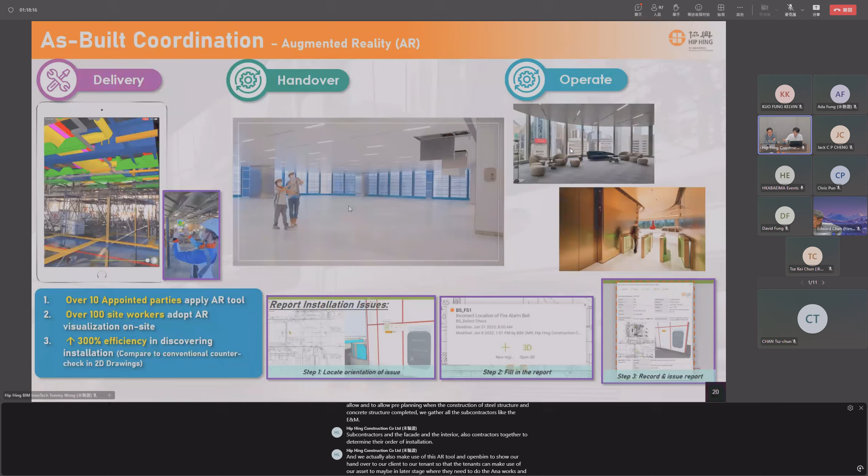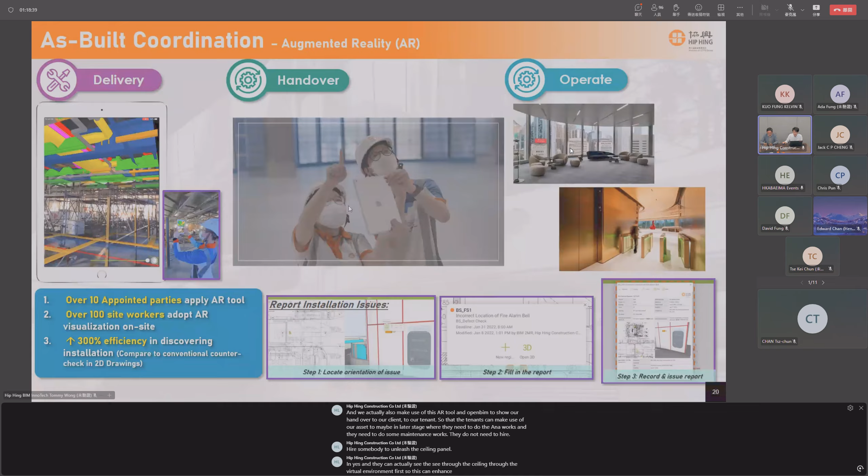So that the tenants can make use of our asset later when they need to do A&A works or maintenance works, they do not need to hire somebody to unlash the ceiling panel - they can actually see through the ceiling through the virtual environment first. This can enhance the maintenance time and make it efficient.

We have gathered all our knowledge and experiences through different types of manuals for all the subcontractors. In our project team, from design stage to construction stage to handover stage, we have a number of contractors - some use Revit and some use non-Revit tools like Rhino, Tekla, Digital Project, and so on. Some of them do not need to be involved in BIM collaboration, but all of them need to provide asset information through BIM or through some digital twin platform. We wrap up all the manuals for them.

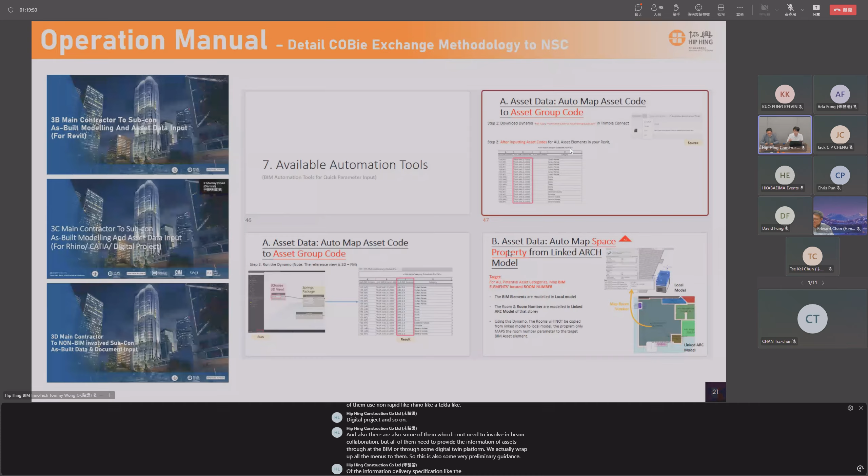This is some very preliminary guidance on the information delivery specification, like the hot topic now in OpenBIM. So these are the lessons learned from our collaboration.

First of all, it's about standardization of the asset code. We actually get the merits from the existing coding standardization from EMSD. We make use of their experiences to find how their experience can fit with our experiences, and then can fit with our actual use in the commercial stage. We also need to align the coding method from the construction stage to the operation stage.

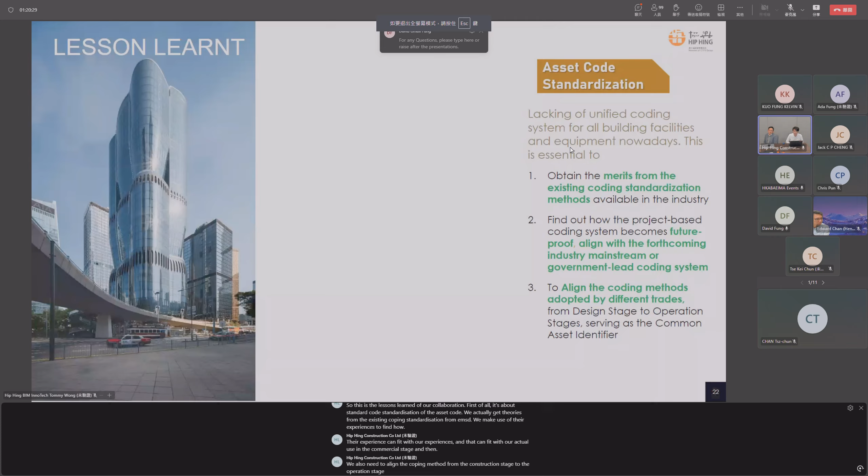On our client side, we show our highest gratitude to our client because they have very high encouragement that all stakeholders in collaboration meetings should make full use of BIM and get immersed into OpenBIM collaborations. They even use a bubble diagram method to calculate how many subcontractors have been involved in BIM collaboration, by what percentage.

Actually, we started this project's design stage in 2017. At that moment, we knew almost nothing about OpenBIM or CDE - probably at that time it was not a popular term. But we came across many challenges because no matter if it was our architectural designer, structural engineer, or other consultants, they used different 3D models or modeling methods.

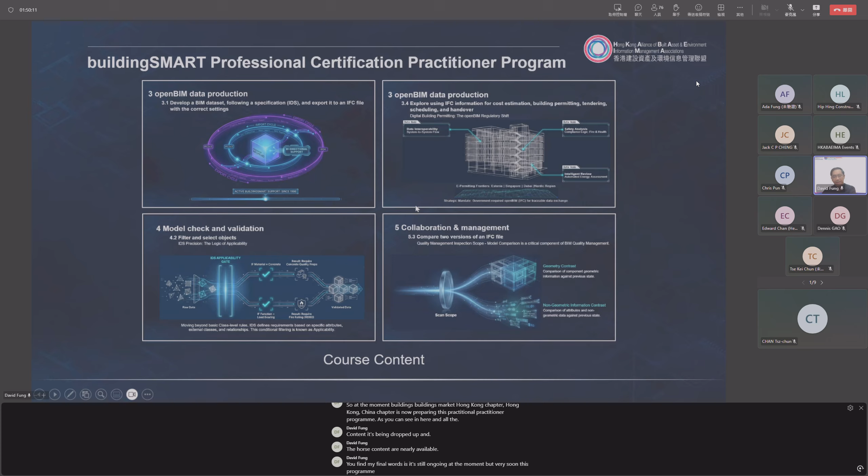So this practitioner-level program has already been released worldwide, including in China. At the moment, buildingSMART Hong Kong China chapter is preparing this practitioner program. As you can see here, all the content is being drafted up and the course content is nearly available. My final words are that it's still ongoing at the moment, but very soon this program will be released, so please stay tuned for further details.